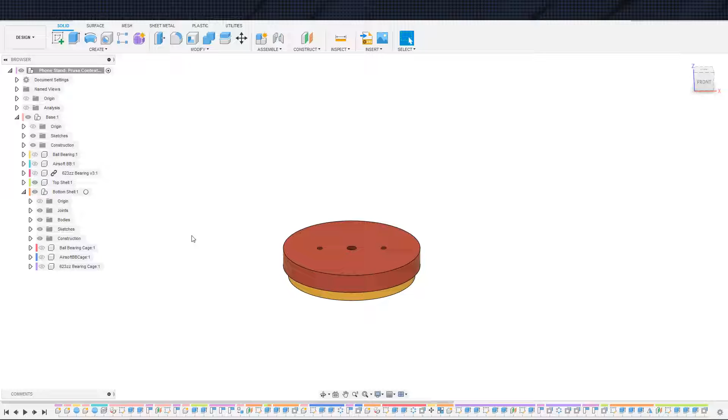You probably should have watched the other video before this one, but last time what we designed here was the Lazy Susan part itself. So we got the top shell and the bottom shell. The bottom shell is going to have cages. Let me do these one at a time. 3 different types of bearings. And then we are going to attach to the top of it a phone holder.

And one thing that I kind of mentioned in passing is we will also be attaching feet to it. I might have been very vague about that one, so if you missed it, understandable. Anyway, a couple things to bring up since the last time we talked.

Let me switch you over to the desktop camera. Desktop camera's not plugged in. 1 second. Whoopsies. All right, should be coming up here. All right, cool.

So I printed the first version of it and printed a cage. Now this cage is the metal ball bearing cage. And I went with this one to see whether or not the airsoft BBs, which are slightly smaller, would get jammed up or anything like that. They don't. That's good. Furthermore, I found that this actually is going to need a little bit more space. I gave it 0.5 millimeter before. I adjusted this to 1 millimeter on future versions, an extra half millimeter on each side, total of 1 millimeter.

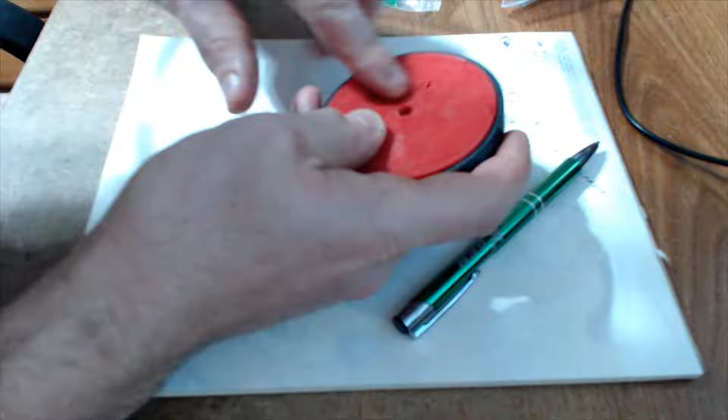Just like this, it may not work terribly well, which is why feet may be useful. Now, obviously, you could just do little rubber stick-on feet. That would 100% work. But I figured making it remixable, as they call it on Thingiverse, giving some options to add to the design would be good. So we got those sunk in there. Now, that is set up 1 millimeter. I looked at it. It's not going to hit anything. So we got that space for that to be sunk in there.

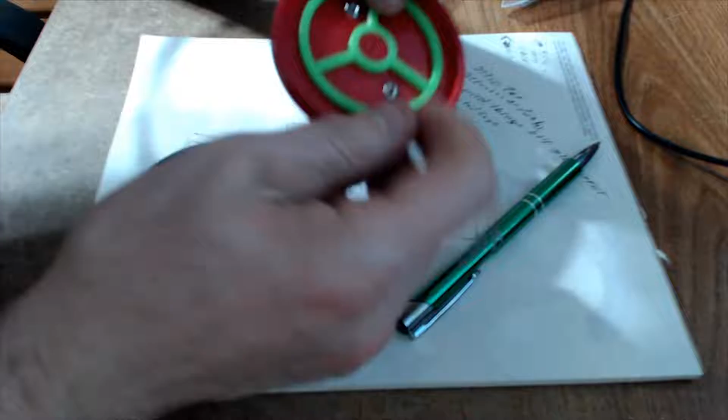On the other side, you'll see those are actually sticking up 1 millimeter. And that would interfere with the roller bearings design because we have that just running along the floor, and we only gave that 1 millimeter of space above the floor. So we're going to go ahead and redesign the spokes for the roller bearings this stream to get that set in.

I don't think we did this on the previous stream, but for this 3-bolt I went ahead and recessed both of these. I don't think we did the bolt at the top, and the reason I recessed that bolt is that if we use this mounting method here, then we really want this to be flush. If we're going to put a plate on here, we don't want to have to design around this bolt. So that's why I went ahead and recessed that. And I made some notes here, so let me just see.

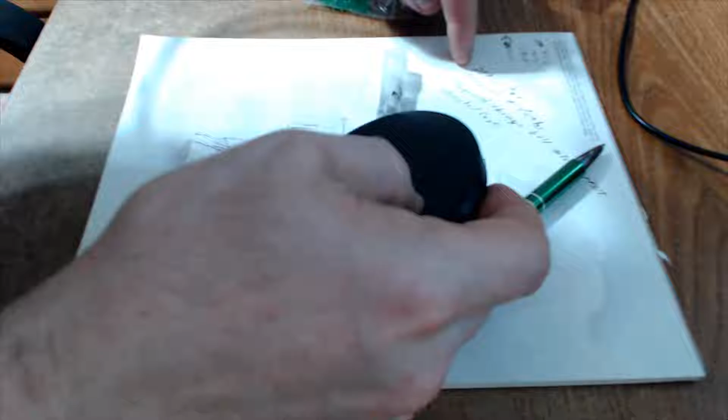I also said something here. I honestly can't remember at this point. I think it may have been that we never put the offset either here or on here. I can't remember where I put it, to give it a little bit of slop and less friction. That may have been what that offset is that I noted down that I added.

So anyway, those are the changes I wanted to get done off stream so that I would have this printed piece and I wouldn't have to print another version of this with adjustments made. Now, final thing to talk about, interesting, this actually isn't too bad. Without any bearings in here, and sorry if that's loud on the microphone, this is not too hard to rotate. So it's an interesting option to be able to run this without bearings if you don't want to invest in the bearings.

So yep, that's everything I can think of to get you caught up on where I was at. So let's swap back over to Fusion.

And I thought I started my music, but it doesn't sound like it. So let's get the music started.

All right. So, like I said, one fix to do, which is the cage down here, the 623ZZ's cage. You will recall that I said originally you could just run the spokes right through the middle, and now I've got to adjust this up in order to clear these nuts here that are only half embedded.

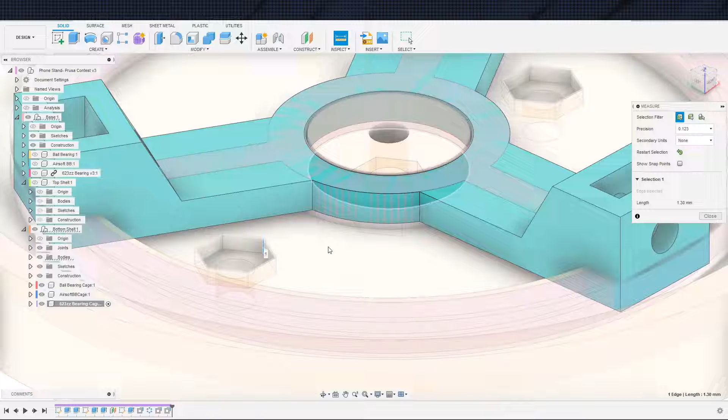Oh, that is one other thing that I did. They're half embedded because I added 1mm to the bottom and then countersunk it. Actually, let me double check that just to be sure. Okay, so they're up by 1.2mm. I countersunk it 1.3mm. So again, ensuring the integrity of the bottom of the bottom shell by not having the nut so close to the bottom edge, and compensating for that by having it sticking up a little bit.

It's not a bad idea, and like I said last time, it made more sense that this bearing cage probably should just be a lot more streamlined. So we're going to go ahead and take care of that this one. Now, the only trick is that basically we're going to back all the way up here, and I'm just going to go ahead and delete everything.

But we're going to have our spokes, our central hub is going to have to go down to the bottom shell. Let me turn the bottom shell back on. So this right here, if we look at this distance here, that's 3mm. That's what we brought it up by.

And oh, actually, there's one more thing. Okay, I'll have to remember that for later. There is one more thing I wanted to show you, but it's not relevant to the conversation at the moment.

So this is up by 3mm, but the center of the 623s, the roller bearings, is at 5mm. So if we just took a spoke from the 5mm mark and ran it outwards, that would be above this 3mm mark, which means that we're going to have to also drop that down. It's not that big of a deal, but it is something I'm mentioning right now.

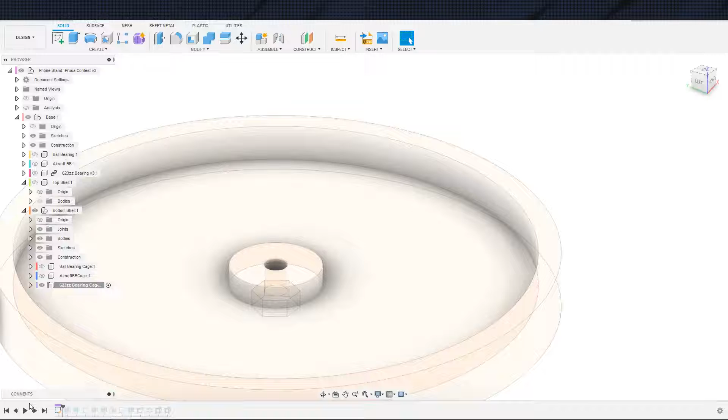So let's do this. Actually, let me skip this too, and I'm just going to delete everything after that, because we're just going to completely redo this. So 5mm is our center point on the bearing. So let me go ahead and call that bearing center plane. Okay.

And this is one of these things where we have an option on how to do this. Let's look at this really quick. If we're going to go down in order to intersect with this hub, how this wants to be printed is actually the top edge here face down on the print bed. So while I would normally want to do nice little circles, because circles are more aesthetically pleasing than squares, we want this top part to be flat.

So we have an option at any rate. We could sketch on this plane and use this 5mm offset that I just put there as a reference, so I don't have to go back and delete it. That would allow us to do something like this. Let me just sketch it up so that you're seeing what I'm saying. So we could sketch something like this, where we cut this circle off like this, and then the connection point, let's call it this.

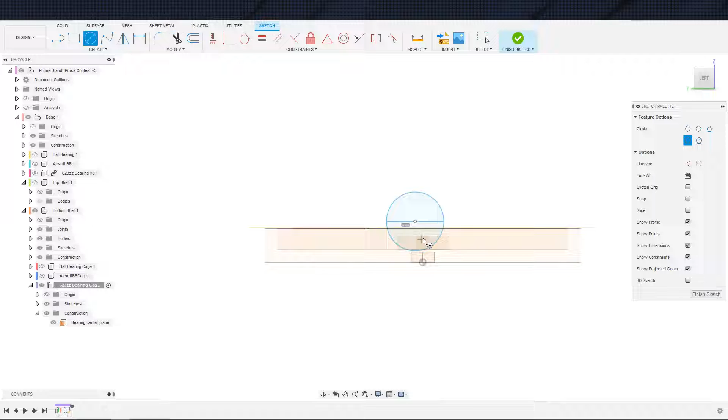So we could make a round shape like this if we wanted to. And then the only trick is that this random point right here, which I'm just drawing in, pretend that's centered, that just has to be centered on this 5mm part. That way, this random point, which is connecting through to the bearing, is in line. That's the only thing we'd have to worry about.

And again, we could do it like this, or we could design it top down. It really comes down to preference. I think I'm going to design top down first, and then maybe we come back here and do this plane, and we just figure out how we want to go about getting that implemented. But the reason I'm starting from the top down is that getting the hub situated first is the easiest place to start. It gives us a reference point. So let's go ahead. We're just doing the hub right now. We're not going to do the spokes just yet.

Again, this is at the 5mm part, so technically speaking, it's maybe a little bit below where we're going to want to end up. For example, if we have 3mm thick spokes, those want to be centered on 5mm, which means that half of 3mm, 1.5, would take us up to 6.5. I don't know why I added the extra in there. I divided the half in half again. So anyway, 6.5 would technically be the top of this hub. We can go ahead and adjust that later. We can just extrude the top of it up to match the spokes.

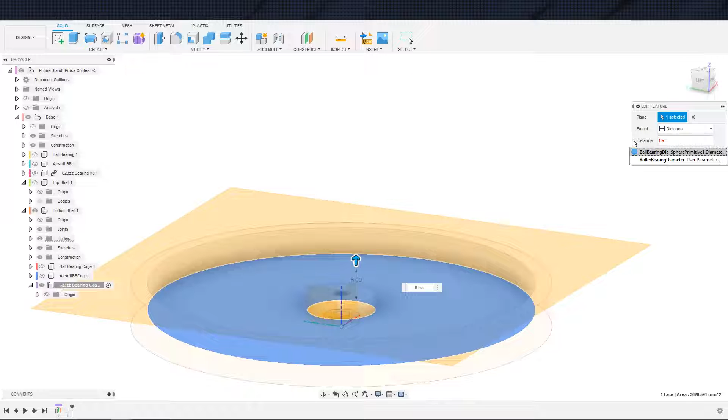Or we could, because I already named this bearing center plane. No, okay, I take it back. I know I'm being wishy-washy here, but we are going to make changes because it makes more sense. So let's do it like this. The roller bearing diameter divided by 2 gets us to the center point, plus wall thickness divided by 2. And that will get us our 6.5, as you can see down here in the description. And this is also now parametric, which is nice, although frankly completely unnecessary because we're not going to be changing any of those parameters. So that is now the very top of what we're about to build here. This cage.

It's not really a cage because it's not actually containing the bearings themselves. It is the spokes, the hub that's going to be... turn you off a second so I can click this. And I just did not complete that sentence, and that's okay because you know exactly what I'm talking about.

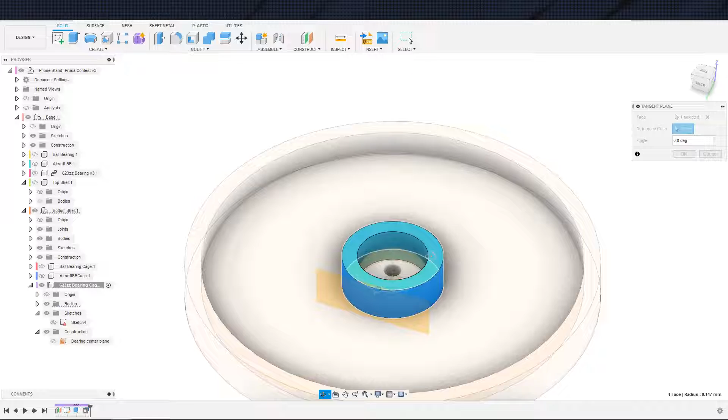Alright, and then again, last time we decided to offset this a whole bunch, a lot more than I normally do for 3D printing, because this wants to run as freely as possible around the central hub here. And let's turn this back to blue, just for my sanity, because the other one was blue. And now, coming off this way, I'm going to do a tangent plane, just so that I'm not working from the center and have to offset. So let's just grab an origin to reference. There we go. And it doesn't matter which one we're referencing because we're only doing one and then patterning it around.

Sorry. One other thing while I'm talking about patterning around, the other cages, I didn't say this, but they don't necessarily need to be 3 spokes going all the way around. I want to just have that said for the record. They could be just 1 spoke because all it's doing is positioning, and there should be, at any rate, no lateral movement of the bearings towards the inside of the ring. And therefore, it's a bit of a waste of time.

I mean, waste of time may not be the correct way to say it, but it's not accomplishing much, let's say that, to have, yeah, I guess that would be tangent to that line because we already compensated for it. Regardless, it's not accomplishing much to have the extra spokes because they're not actually bearing the weight.

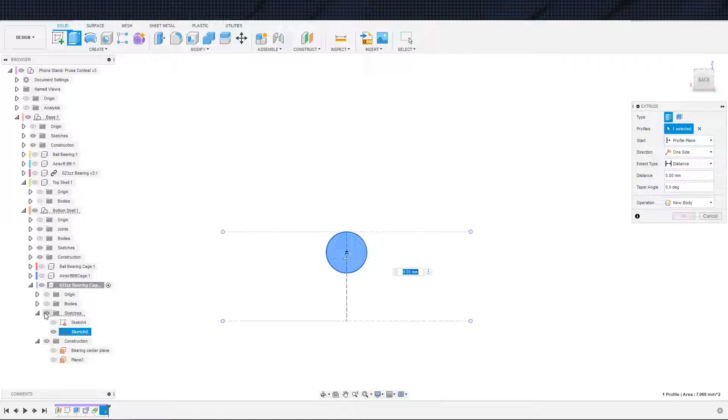They're not making, you know what I'm saying? They're not stopping anything from going anywhere. You could just have the one spoke to keep the outer ring in place, and then you'd be good. So it's a little bit of extra plastic, but how do I say this? It's more reassuring to have the extra spokes holding it in place. And I'm just trying to think.

We had a number, and I already deleted the other one. So the question is, where was that number, and do I need to bring it back up? And the number was how far out this spoke extends out towards the wall. And I think I will go ahead and redraw that in. Let's hop back into, well, try to hop back into the sketch.

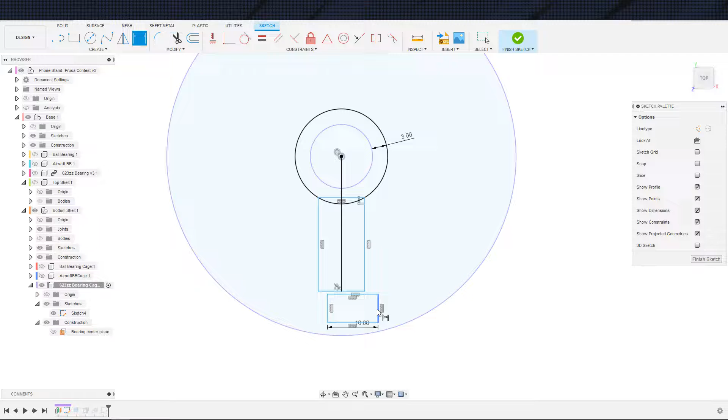Okay. So here's our inside wall, and as you will recall last time, we did one of these. Yeah, I'll just use that. Did one of these. That's centered. And then you'll recall these were coincident. And then we had the 10 millimeter bearing there. And this was 4 millimeters wide, as I recall. And this is just our mock-up of where that bearing is.

And that bearing, I can't recall if we gave it a little bit of breathing room here, whether we actually put this in like 0.5 millimeter from the wall or not. But we did something along these lines. Actually, I seem to recall us having another circle here because we had this tangent to something. However, that should be unnecessary at this point. It should be sketchable like this. So, stop. Don't move. I just want you to construction line. Alright, so that's how long our spoke is going to be.

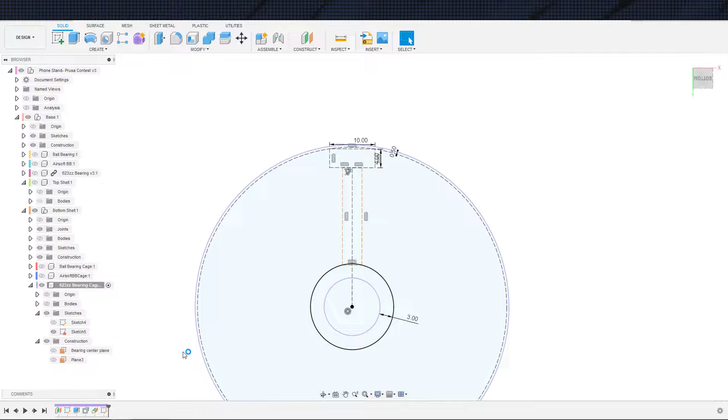The question is, I'm kind of curious how this is going to work. You are on the wrong side. Everything was upside down. That is unfortunate. What if I do this, is my question. Let's turn the bodies back on to see what's happening. Yeah, okay, it will work. I just have the sketch on the wrong side. We are on the bottom right now. We want to be on the top. And then that is front. So actually that is in the right place.

Control Y. Remember when I said it didn't matter where this tangent plane was? It's going to matter for us now, because we have to line it up with the other one. Alright, there we go. Except for when we flip it upside down, of course it does that. Okay, the top's still there, so that's 5 millimeters.

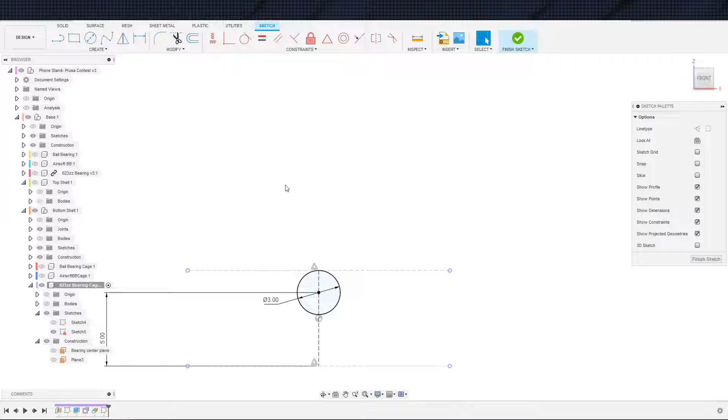And again, I could just tangent this to that, but because we're most concerned with this spoke being centered on the bearing, it's better to just call that center of bearing instead. Roller bearing diameter divided by 2. There we go. The other thing I should probably do is this should probably be 4 millimeters, in which case we're going to have to redo our math. So let us change that to 4 divided by 2. Yep, that's still in line.

The reason we're doing this is because on the back side of the bearing, let me just swap you over to the camera. So on the back side of these bearings, this is a 3mm bolt right here, M3 bolt. You can substitute this for the plastic that we're about to print. If this is 3mm all the way through, then it just goes straight through; by opening it up to 4 or 5mm on the spoke, and I may even do 5 just for the heck of it, that gives us more meat for it to be pressed up against.

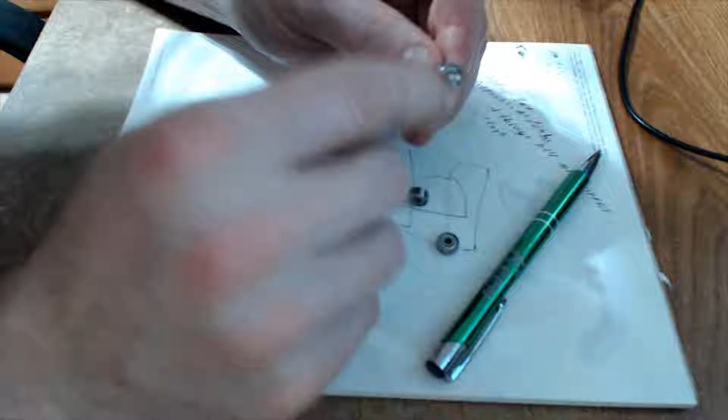Again, imagine this set going to the hub. So this part extends to the hub. This is 5mm, 5.45 technically on these button heads. Button heads might still be 5.45, might be 5.5. We then go down to 3mm to get through, and again, that's the clippy part I was talking about last time that was going to be one of the snap-on features. We'll have a snap-on joint.

The alternative is we could use bolts, screws, and come through into the plastic, leave a 3mm hole, which will be slightly undersized because 3D printing, and then just tap threads into there. That is an option. That is absolutely an option. We'll see what happens. The snap-on feature sounds funner.

It sounds more fun. However, the problem with the snap-on feature is that for features this small on an, what do you call it, an FDM printer, it's not going to be terribly precise. So it may be better just to take bolts and tap them on there, but we're going to attempt it with the snap-on feature instead. So let's hop back over to Fusion. I'm getting better at not forgetting here. And now let's get this spoke done.

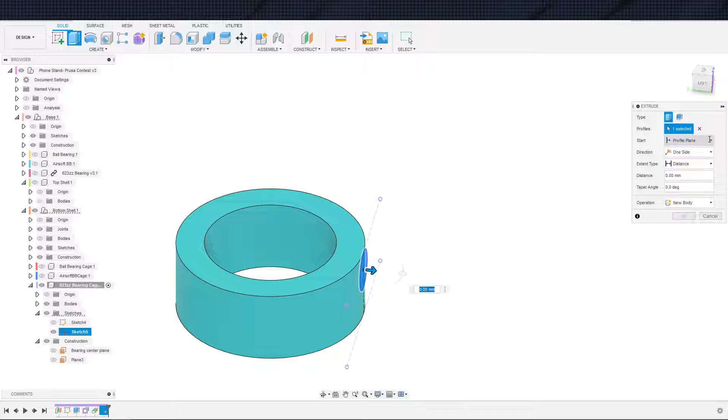From object and distance. So it's one of those things, the two objects thing. Okay, it's not showing it here, but sometimes they give you an extra toggle box down here, whether you want the closest extent or the furthest extent. It's not giving me that, so I've got to come here and look at this and say, okay, I'm pretty sure that's connected right there. Yeah, that is connected there. So it did come all the way to here.

I have had times, especially when cutting into an object, for example, if I had text here and I was trying to engrave text on this, I've had times where I've said start from the face of the object, and it will do some parts of it, but not others. It's a bit weird. So just one of those things I'm telling you so that you can watch out for it when you're designing your stuff.

Actually, I'm going to go ahead and give us 2mm here, because the snap through functionality, I want to leave a little bit of space for. So if we come a millimeter out the other side, actually, let's go 4, because again, these bearings don't necessarily need to be so close to the edge. So if we go 4 and then we're out by 2 or 3, we still have 1mm of clearance here. So we should be good.

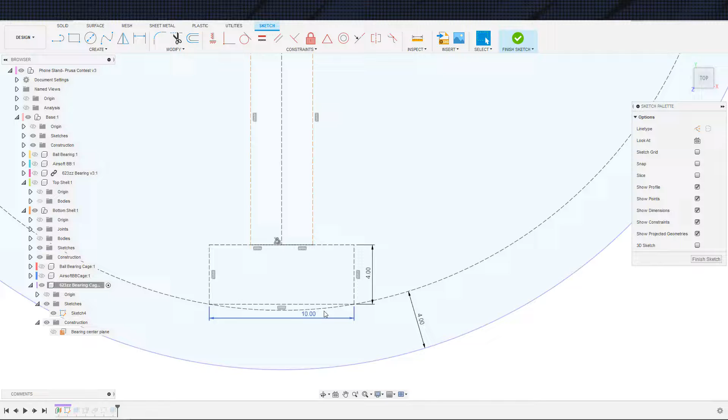So let us go ahead and... How do I want to run this? Again, I can come down here. Spoke tangent plane. I could reuse this and then again extrude from object here. That way I don't have extra planes that I'm not going to use, and I think that's probably what I'm going to do. I was talking about this before we started, and then I forgot to actually do it. Okay, stop being silly. Finish. Double click that. There we go.

When I first started drawing this, you saw me do this circle here, and then I went and put the other circle down here, and I was like, oh, whoops. That's what I meant to do. We want to keep this flat for 3D printing purposes because we're designing for 3D printing. So we want, when this gets printed, to not have any overhangs, and therefore this extrusion here is actually going to be all of that as well. So you can see this is the D shape, and we're doing that only because it's going to be printed like this.

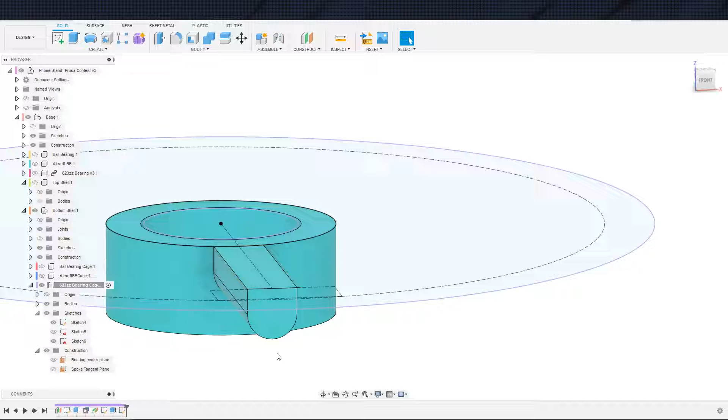So with that explanation out of the way, our next problem here actually is back to 3D printing and small features. This feature is going to be small, and therefore it's going to be difficult to print. Plus, if we center this right here, let me just do this so that you're seeing what I'm talking about. Oh, that's funny, it's not giving me center circle. So let's draw that line in. So if I do my 3mm snap feature here, you can see that's going to be suspended in the air, printing from here. So let's flip this over again, just in case you have trouble visualizing.

When this prints, it's going to be floating in the air here, which means that it needs supports, and supports are going to make it rougher on top of the fact that it's already a very demanding feature. So at this point, I'm actually thinking that we will go with that second option I was talking about, which is the self-tapping hole. Let's see here, turn that off. There we go. So we will just put a hole in here, and you can thread some bolts into it in order to attach the bearings. That is how we will go about it. And we can make it any number really. So let's just call it 10, minus 10.

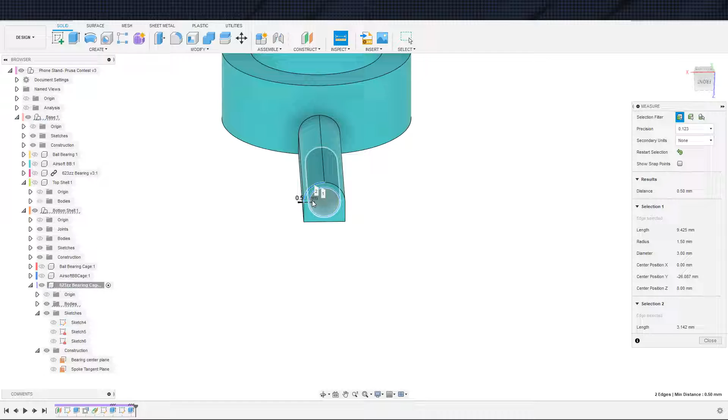And the next question is that wall is a little bit on the thin side. Yeah, it's only 0.5 millimeter. So we're going to want to make that bigger. And, I just keep on adding ands. We're getting a little tall here.

Now, I don't think it's actually tall enough because our upper limit is 10 millimeters. So right now we are at 5 plus 2.5, which is half of the 5 millimeters. I think that's what I made this. Did I make this 4 or 5? All right, we'll come back here and find out. Bearing to center plane. I made it 4, didn't I? Let me edit feature. Please let me edit feature. All right, I left that at 4. So we're at 4 divided by 2 is 2 plus 5 is 7.

We just need to get below 10, and that means that we can have up to 10 millimeter because 5 and 5 is 10. So the point being is that we could have a very large spoke coming out here. So we will just update this to, let's say, 6 sounds a little big. 6 is quite thick in terms of plastic. It's going to seem a bit bulky, so I'm going to leave it at 5, and we're going to call it a day. So at 5, this should now be between here and here.

1 millimeter, it did not update. Let's see here. Oh, and actually I know exactly why. So let's come back here. And we're going to do this. I can't start with a letter. So spoke, we're just going to call it spoke dia equals. And we just got to throw some extra parentheses in here, if I recall correctly. Should work. It did not work. I could have sworn I've defined these inside before, which is a little bit funny. Alright, we'll define it outside. That's fine. Change parameter.

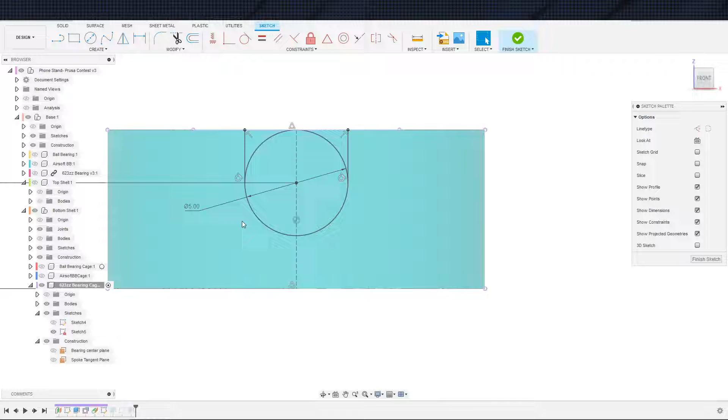Actually, can I retro this? It's one of those things, I try to define parameters before I use them, but this is a situation where I can't, so we will attempt to do it this way. And let's just double check that that's 1 millimeter now. On the outside, it is 1 millimeter. And now if I come back to, actually, let's think about this. That hole's not centered on that, is it? No. Okay. I don't think it is. So, therefore, we come back here. Basically, I was wondering whether or not we had to... Huh. Why you got a problem with me? There we go. Okay.

I was trying to figure out whether or not we needed to make any other adjustments here, but we should be good. So, that is 30 minutes in for the record, and that was a good bit more time than I expected to spend on this portion, unfortunately. But we are now done. We just circle pattern this out, and that is the update to this cage hub thing. Again, we'll just leave it at just okay. Adjust was not the correct option there.

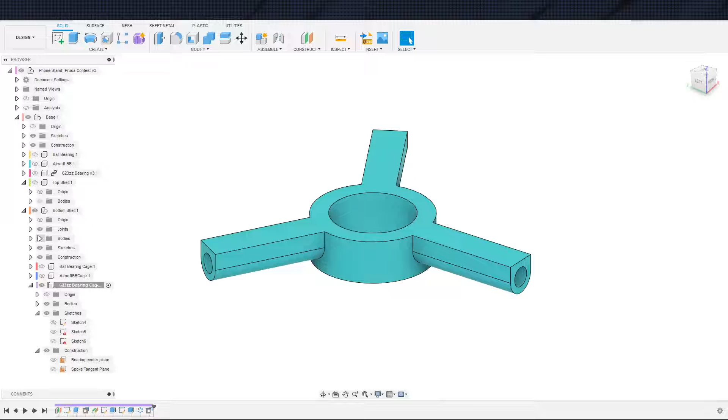Alright, there we go. And actually, the one thing I will do is, I don't want any scraping here, so I will just offset this by 1 millimeter, because all we've got to do is be on the hub. We don't necessarily need to be all the way down on the floor there. So long as we have at least enough that it doesn't slip off, which it shouldn't because the top shell should be holding it down in place. So for all those reasons, we should be fine. This hub shouldn't go anywhere, so long as it has just a little bit of grab on the central hub of the bottom shell. So that gets us onto the main point of this episode, which is the phone attachment.

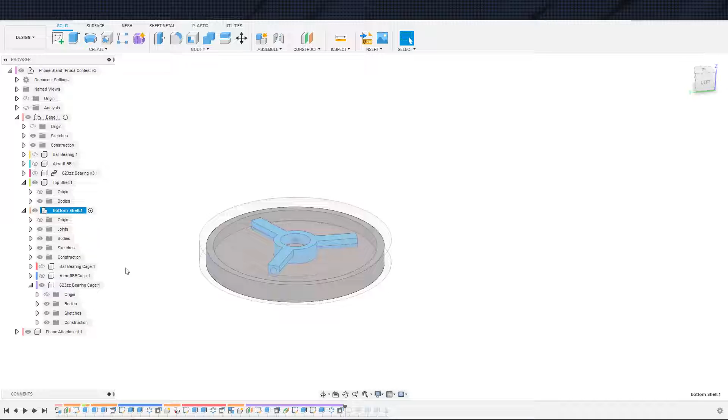Yay! New component. Phone attachment. And again, one of the reasons why I've added these little mounting holes on the top here, and let's just really quick show that. Oh, where did they go? Tell me I did not. Does the bottom shell? Oh goodness. Okay. Either this account did not sync or I did not hit the save button, and by account I mean this instance of Fusion. Huh. Okay. I will add those back in. That is very unfortunate. Okay.

Let me resync this. Hey, look, there's stuff over here you don't know about. Resync. Versions. 623. Oh, I see what happened here. Okay. Scary moment averted. Is this the phone attachment? Yeah, it is. Okay. Now I know where that is. We were back in the timeline. Okay.

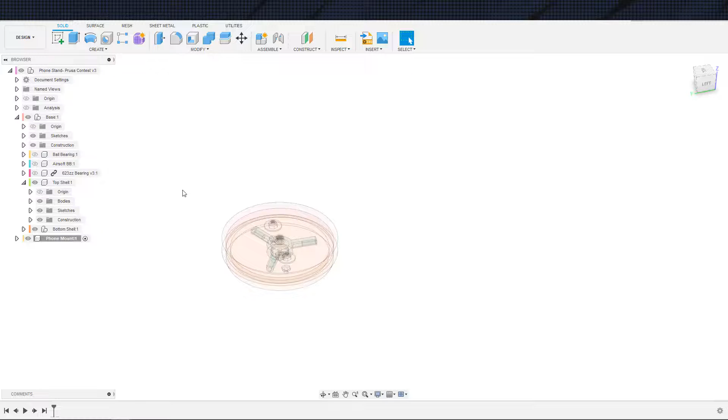Anyway, what I was going to say before disaster nearly struck there is the reason, again, that we have these instead of me just hard designing the phone mount into the top lid is so that people can make their own phone mounts. That is the idea and the purpose, so that this is extendable and other people can have fun with it. Otherwise, I could just design it directly into the top lid, and that would be a thing.

Obviously, if you want to get technical, that would make it more difficult to print, and therefore it is better for it to be detached, but it doesn't necessarily, but it is an option, is what I should say. It was an option, and my reason for not doing it is because I prefer to have the option available for other people to create their own phone mounts. There you go.

So let's toss these in. These are the ones that we're concerned with, and let's do a slot. Slot, and we could do center to center. Center it there. Radius this out. Whoops, not that kind of radius. Like that. Just 3mm is fine. Again, 3mm is my go-to number. So after this is assembled, then you can slap... Actually, no. We do need to leave this hole open. Good thing I thought about that before I said something that made me sound pretty stupid. Alright.

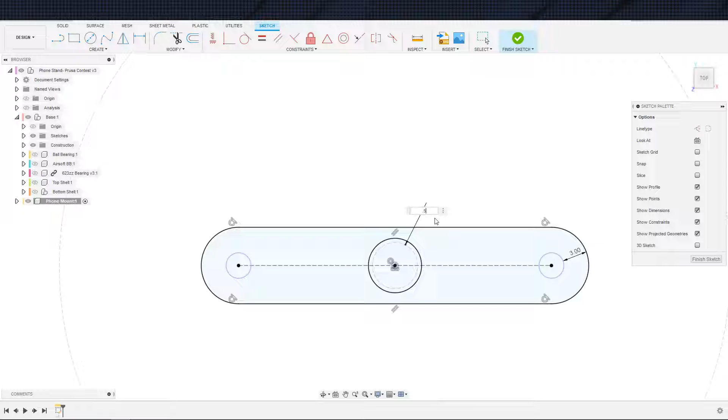You will have to attach this base first before you attach the top shell to the bottom shell, because all these bolts are right here and you won't have access to it. So that is something important that I'm going to have to keep in mind to make sure that everybody is aware of. 0.5 is more than enough just to make sure that we're clearing. And let's get this popped out. And just as the mounting plate, that wall thickness is fine.

And what color do you want to be? We already used all these colors. Let's see what other colors I randomly have in here. Plastic opaque, orange. Have we used orange yet? Yeah, we used orange. Brown. You are now brown. Cool.

All right. So, again, this is going to be a two-part mount, and the first part can be... Actually, do I want the first part built into this? So this was one of those design decisions that I did not make yet. Actually, let me even do this. New component is what I should have done here. Back to just keeping everything organized, and in order to introduce joints, it's easier to have everything as their own components. So there we go.

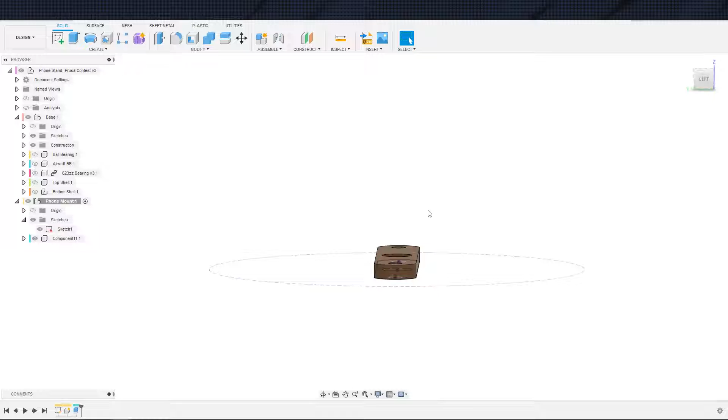The mount is going to want to be pivotable, I should say, in the YZ basically. So if we're looking at this Z-axis, actually that would be X. No, I'm looking at it wrong. There you go. It was Y. So going from Y minus to Y positive here, depending on how you're looking at it, we do want it to be able to tilt this way, that way, because we're assuming that you're not always looking at your phone straight on. So we do want to build a pivot into this. So let's go ahead and do that.

So we're going to call this the attachment plate. And we'll activate it. And then the question is, how do we want to go about defining? Because we could just grab this origin plane here, but that's not very well defined. So let's do this. We're going to go axis through cylinder. So we got an axis here.

We can now go plane at angle there and 90 degrees. And then the next question is, do we just want to design on this one? So let's call this center of through hole, and that is the Y center of through hole. So do we want to just design on this and then offset it, which is completely reasonable, or do we want to more specifically, and I think we will, do the same thing over here?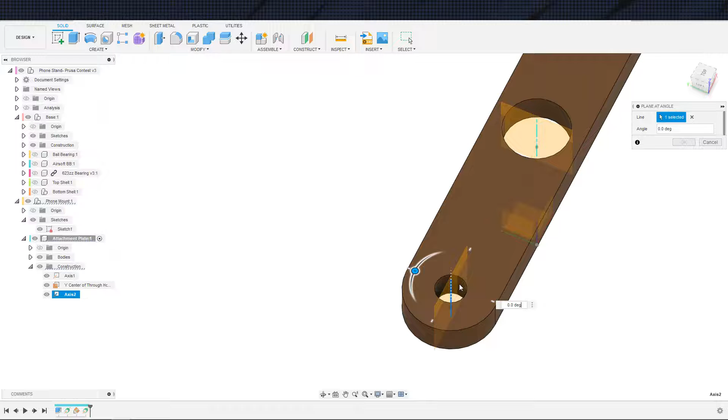It's one of those things. I've said this a few times before, but in case you don't watch all the episodes, there are 1.5 million ways to skin a cat, and there's not necessarily a right or wrong way all the time to design something. A lot of the times you're going to design something once, and that's going to be it. And if we're from the front, this is the Y left mounting hole. You're going to design it once, and then you're never going to go back to it again in many cases, and therefore it doesn't necessarily matter how you do it. So this is a bit obtuse the way I'm doing this now, and not even necessary, or at the very least more convoluted than it needs to be. However, it does make me happy, so there's something there.

Alright, so I really don't like that projection. Let us come back here and grab a different projection. I am going to grab that edge, and then I'll just fill it in. Projections always break anyway, so while that's probably not the best projection, it gives me the fewest amount of things that can break it. It's only 2 edges, as opposed to when I took the top face as my projection. That was this circle, that circle, that circle, this edge, that edge, this face, that face, that edge. It gave me a lot of different lines that could get screwed up and would have to be redefined. So that is why I grabbed those 2 edges instead, because it's a lot easier to re-project those 2 edges.

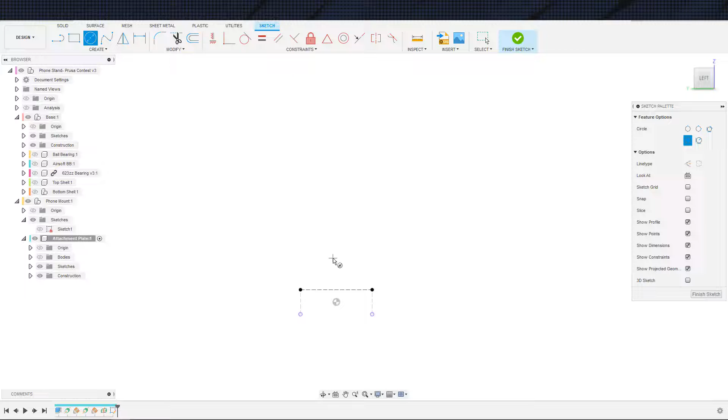So with that explanation out of the way, let's get this thing drawn. Tangent, tangent, perpendicular, perpendicular, okay. And then our mounting hole here. My general design philosophy is, if you start out with M3 bolts, then you generally should just continue using M3 bolts for everything, because that makes it easier to source bolts for the project. But this being a hinge, I kind of want to go up to M5s, if not M6s. M6s is probably overkill, so at least M5s. Yeah, I think it's worth it. So we will make this connected via an M5 bolt, is the conclusion I've come to.

And this height is probably not going to be relevant. So let's make it as small as possible and tangent that there. And we can go ahead and pick that up. So this here, body, and we want a symmetric, that way this is still on center, whole length, and I think I'm happy with wall thickness. Whoops. We could make it a little bit thicker because it is a hinge holding the phone. Yeah, I feel comfortable with this. So there's one hinge, and actually, you know what? I take it back. Already changing my mind.

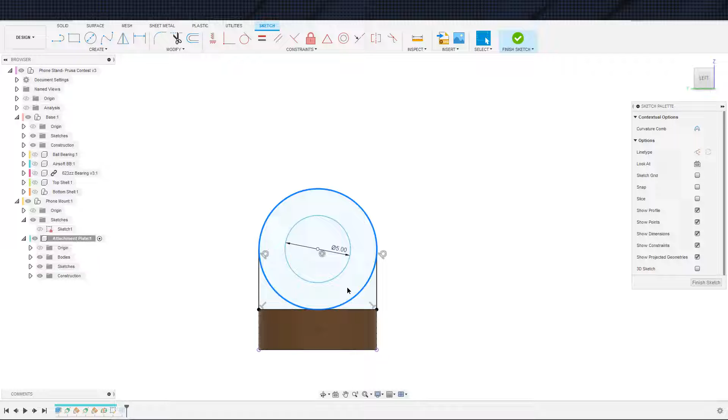We're not going to make this tangent, because I'm looking at this right here, and it's only 2mm, which means that the part it connects to on the other side is going to be thinner. The hinging part that connects to the bottom mount of the phone is going to have less space to swing through, and it's going to have to be thinner. So let's give ourselves another 5mm. No, 5mm too much. 3mm, 2mm. It's 2 plus another 2, that will be 4 overall. I feel comfortable with that. So that's going to be our offset there.

So now we have a little bit more space to bulk up the connection point over here, but it may be better to do it on the outside. So let's go ahead and mirror that over. Feature, mirror, and we actually want to use this Y center through hole here just in case stuff moves. Again, that's why I made all these extra planes, so that we have stuff relative to the features of our object as opposed to relative to the generic origin.

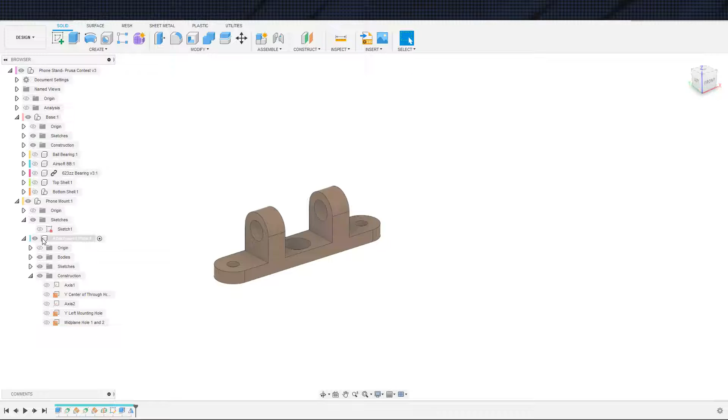So that gets us there, and now we can move on to the next part, which is the bottom phone mount, I guess is what I'll call it. It's a terrible name, but it will work.

It'll do, donkey. It will do.

Now, again, we have an option on how exactly we want to position the start of this. The first thing we're going to be drawing is the hinge attachment. That way we know where we're at. And then after we get the hinge attachment, I'll go ahead and sketch the rest of the bottom of the phone mount. So,

alright, I think what I'm going to do here is hop back over to this and just throw a new plane here and call that side of hinge. Alright. And now we'll hop back over here and use that plane as a reference point. And we just got to get a projection here. We can leave this guy as a solid. Everything else will be construction lines.

And now here again, I can go ahead and make this a full 3 millimeters of space here to give us a bit more meat. 3 millimeters, I'm happy with that. It looks a bit bulky in comparison, but it is the wall thickness that I like, and therefore it's what we'll be keeping with.

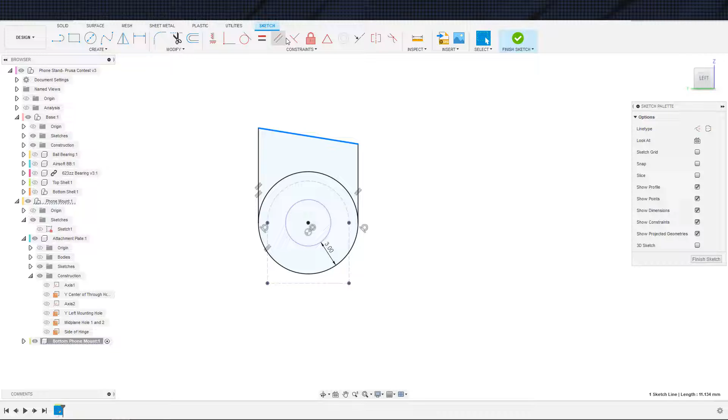Now, this one here, you may recall, let me just hit this really quick so that my brain can catch up. The other one, I felt like I needed some space for the extra hinge space here. This is why I lifted that up, so that I can make this a little bit bulkier. But this one, I don't see any reason not to have tangent. So that's what we're going to do. And we can go ahead and extrude this guy out. I'm just turning that guy back on so that I can see what I'm doing.

And what? I've already forgotten. Did we do 5 millimeters? I think we did 5 millimeters. I should probably make this a variable, like hinge thickness, but I'm doubting I'm ever going to change it.

So the next thing to discuss here is right now, this is going to be PETG on PETG sliding, which means that our hinge is not going to be terribly effective. We can put alignment features on this, and then it would snap into place. You wouldn't have fine adjustment abilities, but we could attempt to set it every 5 degrees or something like that, and basically ring this hinge and that hinge with marrying features so they piece into each other every 5 degrees.

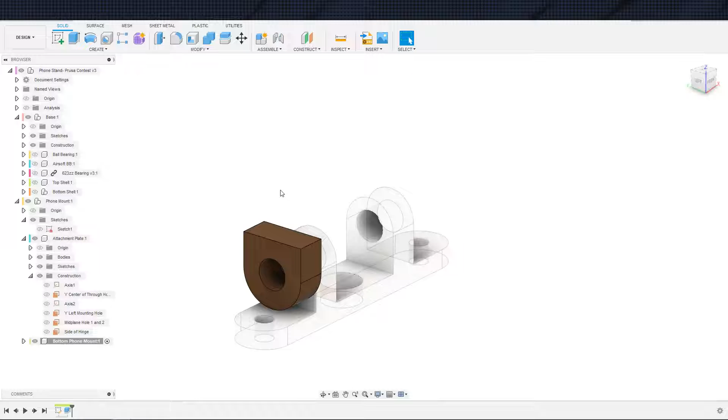Although you could make the argument that not drilling them out and leaving them tight solves this problem we're trying to solve with this hinge rotating freely. The bolt would actually keep the phone positioned in the way that you're trying to set it up. So that is one argument to not drill them out. But the point being, this prints just fine like this. The bottom attachment plate will print straight up and down, no problem.

This guy right here, though, may not print terribly well. Let me just hop here and get this positioned. If you imagine some kind of holder heading this way, we probably won't be able to print it like this, which means we'll probably have to print it like this, and we'll have the design so that the right hand side here where my cursor is, is flat against the print bed. That may be how we're designing this moving forward. We do have, again, this overhang right here.

In that case, if this is, let's rotate again, if this is now the print bed, then we have this overhang here. But as I stated before, I'm not too concerned about overhangs on round parts. I only avoided it on the other one because it was so close to where it was just round all the way around, and it wouldn't look terribly good from the top view is my biggest problem.

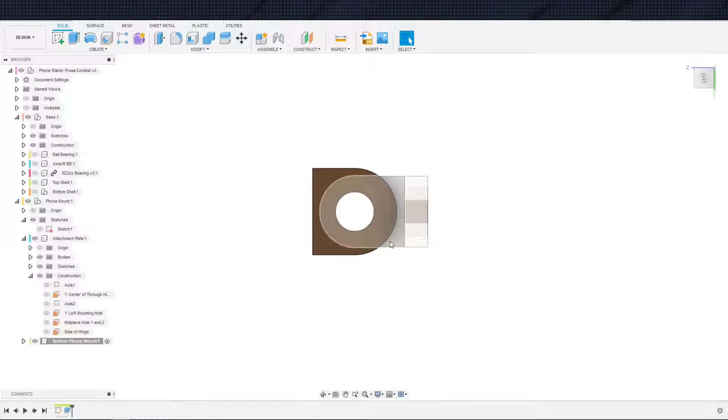Whereas this one, any overhang artifacting that happens here when we print it will be on the back side of the hinge, because again, I'm designing so the phone sits in front of these two boxes that I'm drawing right here. So the phone will sit up in this area, in which case you will never see the artifacting on the bottom side of this hinge. So it's not really an issue.

Well, I mean, it's a little bit of an issue, depending on how OCD you are, but it is not something that's going to be a deal breaker that's going to look really ugly. You're not really going to see it. So that's where we're at right now. And now we can just do a simple phone mount.

And I'm saying simple because, frankly speaking, one thing I should say, actually, I did tangent here. You'll recall back on this sketch, I did tangent. I was only able to do that because I knew that this circle right here is bigger than that one.

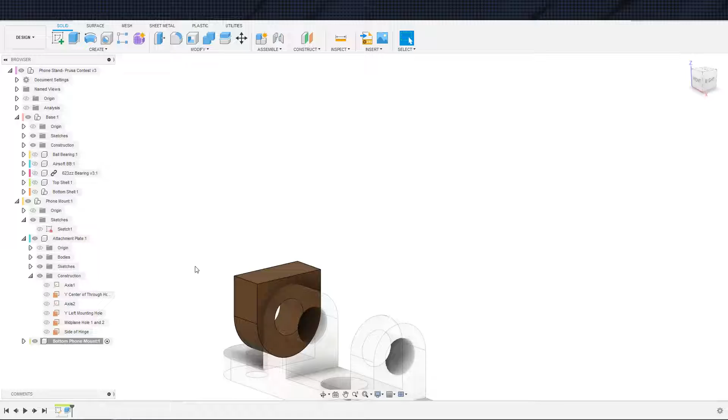If we made this tangent to that circle, then as this hinge rotated, it would scrape against this rotation point right here, which is not a deal breaker. It's not something that's going to stop it from working necessarily, but it would be obnoxious. This, we got a little bit of clearance before we do the top mount here, so we're good.

So all that explanation and thought process out of the way, let us go ahead and mirror this. Mirror, feature, and we'll go back to the center plane on the attachment plate. And again, I leave it at whatever the default is. It used to be that optimize was the default in Fusion, and I just left it at that until something broke. I don't know why adjust became the default. Probably could read the patch notes and find out why. But for the time being, I'm not terribly concerned.

Now, after much ado, we can now draw this phone holder itself, and I will go ahead and use this center of the through hole because that's going to be centered to everything else, and then I will just symmetric extrude out to these two hinges. So let's get one of these hinges as a reference point. Bodies, turn them off, hit the not visible button. And we don't need those, they can just be construction lines.

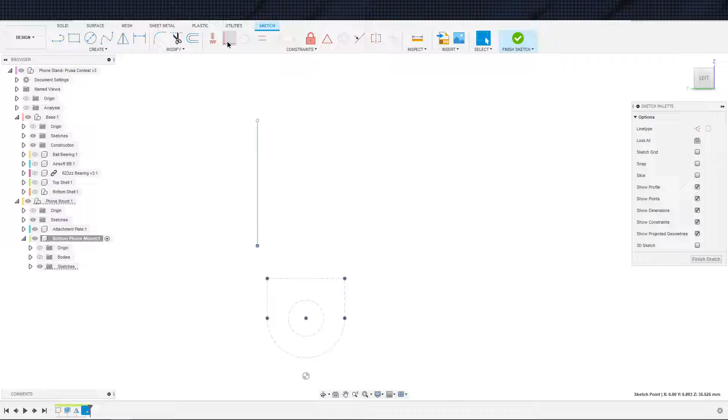I am not a terribly artistic person, and therefore this is not going to be a terribly artistic phone mount. I say that, and I should probably give myself a little more credit. It's not that I'm not artistic, it's just, how do I want to word this? I am only artistic basically in things outside of the computer. Inside the computer, I just have not spent any time figuring out how they work. So I am not terribly concerned about how this looks right now. It's supposed to do a job, it's going to get that job done, and other people can remix this and make fancier mounts.

So this is the general shape of the bottom. Good. We're all on the same page. The question is how do I, and it's the perpetual question. Sometimes I will get this general shape and then I'll do one of these minus wall thickness, and then I'll just toss these guys in here. That is one way of doing it.

The other way of doing it, which I also do sometimes, is to overlap two boxes, and then I'll do, for example, collinear, and then wall and wall thickness. Again, 1.5 million ways to skin a cat. It really depends on what I'm thinking at any given time. And today I'm thinking that we're going to do offsets.

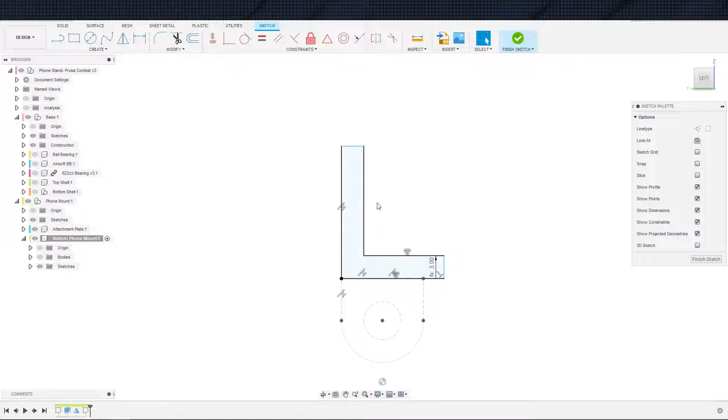So now we need to start taking some measurements of phones. So the smallest that this is going to be able to hold, well, let's take a look. And frankly, I have a Droid Bionic, which is probably not a phone that anybody uses at this point. So first off, let me just say, I'm not designing for somebody to mount their Nokia onto this thing, okay? If you really want to see Snake play itself on your Nokia and you need a phone holder for that, you go ahead and make that one, okay? That's a rather specific ask. I do have a Droid Bionic, like I said, but that is with a project right now, and I do not have access to it, so I can't get that measurement.

So this is a Galaxy S7. Let's go ahead and turn the camera back on, just for the heck of it. This is my old S7. I'm guessing this is on the smaller end of smartphones at this point. The only thing smaller than this that I can think of is an old school iPod, or actually no, the iPod Nano would be smaller, but in terms of stuff that would have a screen that you'd actually want to be looking at constantly, something like an iPod might be the smallest thing. And I don't even know if anybody has an iPod. Well, actually my brother, I think, still uses an iPod for certain situations where he doesn't want to have his phone out. But the point being, we're going to call it 69.5 that I'm measuring here.

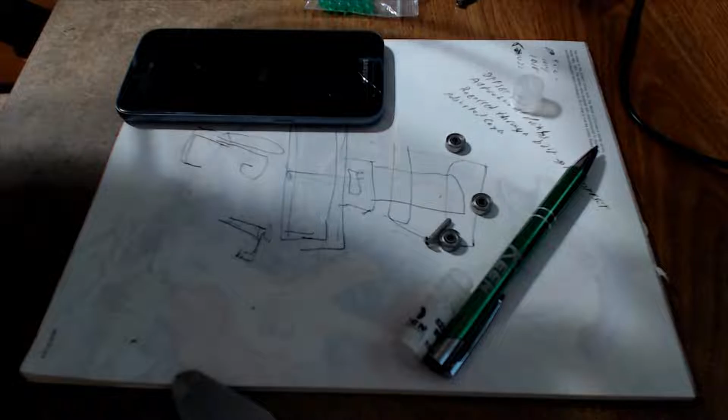If we just make it 60 millimeters as our minimum opening space, I can't imagine anybody having real complaints about that one. Again, the more likely complaint is just that the phone holder does not look terribly interesting. So there's a couple ways we can do this, and actually there's something else that I should do. That was the minimum. The other thing we want to keep in mind is a maximum. So this is my current phone. This one's like 85, so if we call this 90, our overall is 60 to 90, okay, is the dimensions that we're trying to hit. If you want to put an iPad in here, or an Amazon Fire device, it may be one of these situations where, again, I just say, enjoy designing that one.

And the other thing I could say is I could look at other designs that are out there right now that have mounts for phones. Sorry, I know I hop around a lot and my brain just goes all over the place. It occurred to me that rather than doing this very specific mount, I probably should have just grabbed this GoPro mount that I have over here, because GoPro mounts are pretty universal, and just had the GoPro mount as the option. Sorry, I don't have this in screen. This is a GoPro mount that I printed for the tripod that you're sitting on top of right now. GoPro mounts are pretty ubiquitous, and there's probably a ton of drop-in phone holders and iPad holders that fit directly into a GoPro mount. So this is probably what I should design as an attachment on there.

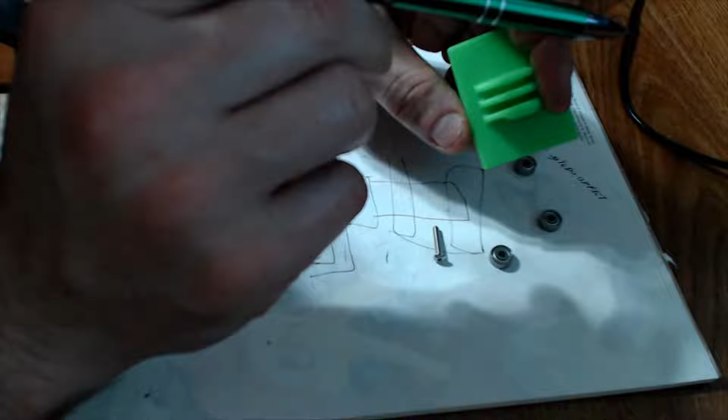Yeah, okay. Well, alright. So here's the argument. If I do this, I was going to say I don't really have an incentive to make an actual phone stand, because I can just say, yeah, screw it, get your own phone stand. But that obviously does not fly. So... why do I gotta make decisions? You guys make decisions. You do that.

And the last problem that I'll bring up is that obviously the GoPro mount is centered underneath the phone, tablet, whatever. Our through hole is also centered. Now, that doesn't necessarily matter. We could off-center this. Actually, let me grab the Lazy Susan really quick. We could off-center it like this. So when you spin, it's spinning a little off-center, but nobody really notices. Especially because any phone or iPad is going to be like this, so the center of balance is going to be more or less dead center of the Lazy Susan anyway. So I'm probably whining and complaining for no reason, and we are going to go ahead and replicate a GoPro mount and undo all the work we just did.

Alright, let's switch you back over to Fusion.

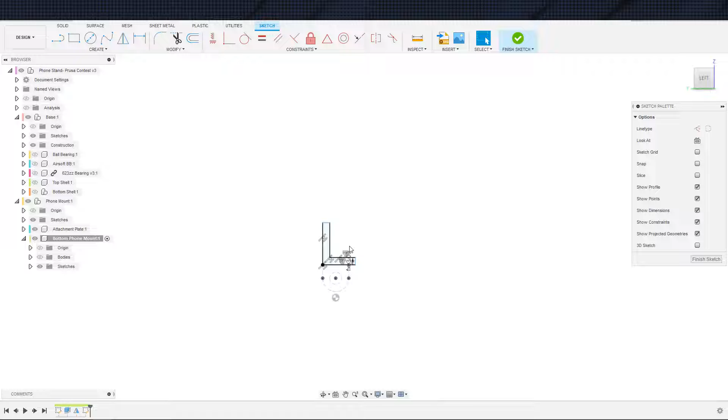Alright, we can get rid of this now. And let's back up. So, attachment plate. What I'm going to actually do here, rather than get rid of all my work, is I am going to go here. Do we want another component or do we want a subcomponent? So I'm going to do something here called boundary fill to create a new component. I just don't know whether I want that as a subcomponent.

Where's boundary fill? Boundary fill. So we'll click that and then click that. And yeah, we're going to go ahead and make that a subcomponent. And I'm going to call this GoPro mount. All right. So now we have this GoPro mount, which is based off of effectively this body right here from the attachment plate. So if I turn this off, you'll see it's still visible because that's the GoPro mount.

And if I go ahead and forward through all those other things, you can see that they're not actually here on the GoPro mount. So in case you didn't know that trick, that's a new trick for you. And now we'll come back over here and adjust this guy to fit the GoPro stuff. So the GoPro, let's see, because I do not remember what kind of screws attach to this guy. Okay, that is still a 5mm. That's good to know.

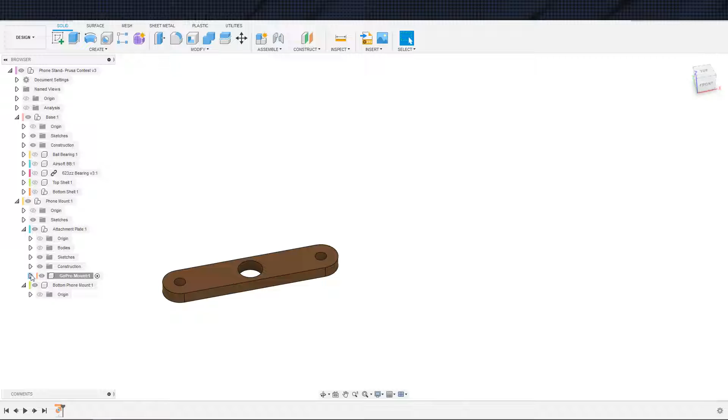So the first question we want to answer is, and I'm going to go ahead and toss, actually let's toss that in here. Just a bottom of plate construction plane. Bottom of plate. And I'm going to go ahead and slide this back here, just to get it way back. And we will go ahead and sketch on that guy. And is this the front here? Yep, that is the front there. Good. Just wanted to make sure I was facing the correct direction.

So a couple different ways we can do this. One, we could bring this all the way out, and I'm just drawing a line for the heck of it, but actually, let's go ahead and do this. Could do something like this and extend a full circle out this way. I don't particularly like that. I think I'm just going to do a circle here, and however big I make it is basically going to be how big we need for this, which looks like 16 and 20 are two measurements for width and depth on the GoPro mount. So if I call it 25, I will be happy. So that will be the diameter of 25.

And I think, yeah, okay, that does come out this way. All right. Maybe I don't do that this way then. Let's go ahead and do depth of 20 and width of whatever I just said. 16, I think I said. All right, we're going to call it 16 and a half.

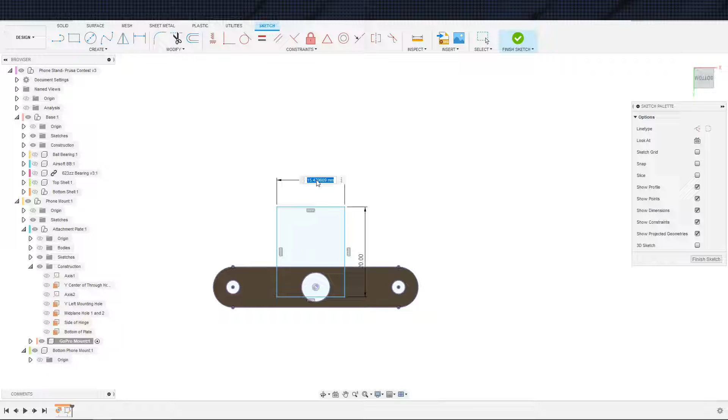So this is the mock-up of our GoPro mount. Again, we need to clear this guy. Let's go ahead and drop a center point in here. And we don't need the full center point. We'll just drop an actual physical center point into it. That missed. All right. Oh, and actually, no, that works. That works. Because I was thinking about going tangent to this anyway.

So we can just put the hole right there. And that is the outline. And we can now go and see what this looks like. And that looks terrible. So I think we can do a 3-point arc, probably. Which way do we want to do this? Yeah, let's see what the 3-point arc looks like. Again, 1,500,000 ways to solve any of these problems.

If I go center point, 3-point arc, what's that look like? Yeah, let's try that. There. 2. It's funny because obviously that's real close. It's one of those things that will be hugging the front there, but who particularly cares?

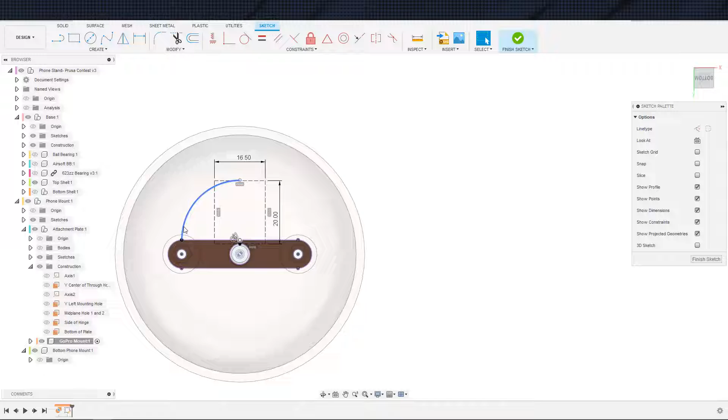Actually, let's check this out really quick. That's another question because we don't want it hanging off of the Lazy Susan. So where's my base? Top shell, bottom shell. Okay, no, we're way smaller than the Lazy Susan still. Wanted to keep a sense of perspective. So we're still good. Huh. Yeah, we may actually be fine here. I'm gonna say we're fine.

All right. Well, it's one of these things, right? At this point, I may as well just do this. If I'm gonna cut the corners anyway, then may as well just use the circle to keep it simpler. Design decisions. Alright, let's go with it. We can always change it later. Distance to object. Cool.

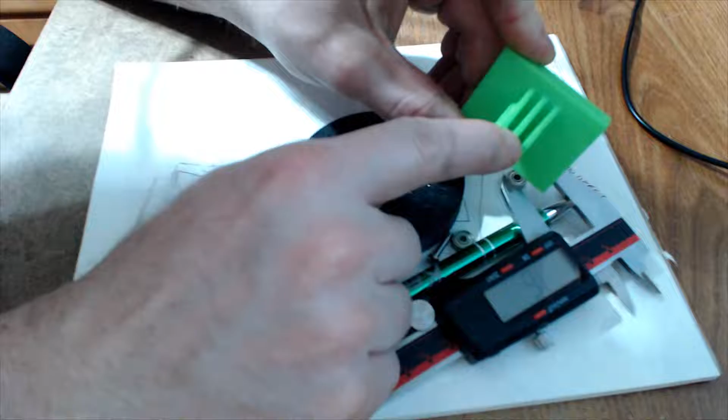And now we will go ahead and make this construction plane specifically on the GoPro mount because this is one that I'm using specifically. Actually, I take it back. We are going to go back to the Y center. And the reason I'm doing that is because if we look at the GoPro mount in physical, we have a center fin here. So we can go ahead and extrude that center fin out the 2 point.

This is saying 2.7. I wonder if this is in inches. What's that fraction? Looks like 7/64? 1/8. Okay, so maybe these are a nominal 1/8 inch. Let's check here. Well, now that I'm twisting it a little bit, it is getting up to 1/8 inch. What I was going to say is there's something called the internet, and we may just want to Google really quick.

GoPro mount specs. I misspelled specs, but shouldn't really be a problem. I'm trying to see if there's any links on this first page. Doesn't appear to. So let me grab an accessory really quick and see if I can't get a spec drawing. Yeah, a spec drawing on a product page for an end user product. I'm not gonna find anything here.

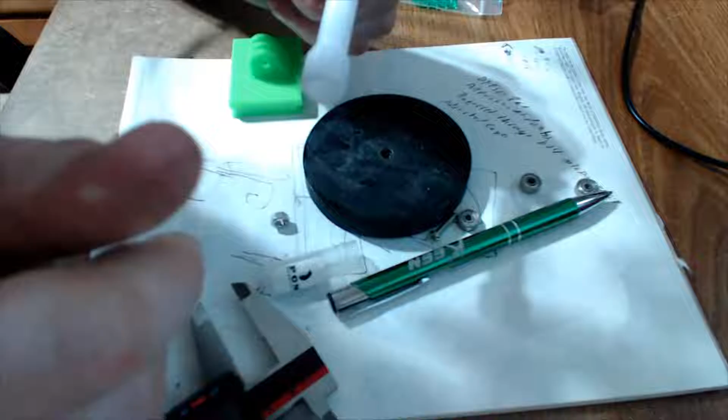So if we're going to be printing vertically, then we want our overhangs to be like this. We don't want a flat overhang on this side. We want the flat side going with the print. That's why I'm positioning it that way, and we'll go ahead and make sure that is perpendicular. And now I just need a measurement for an M5 nut.

Let's see, and I'll pull an M5 bolt out while I'm at it. So here's my M5 nuts, and we said this was, I keep on forgetting my numbers, about 16. All my options right now are 16 or 20 for the M5 bolt. I don't think I have any other sizes of M5 bolts, so I will just grab the M5 by 20. Alright, M5 by 20, got.

Okie dokies. Next thing to mention. So the next thing that I'm going to mention is how we tighten this down, because we don't have a real good way of doing that with just a bolt, with a button head bolt.

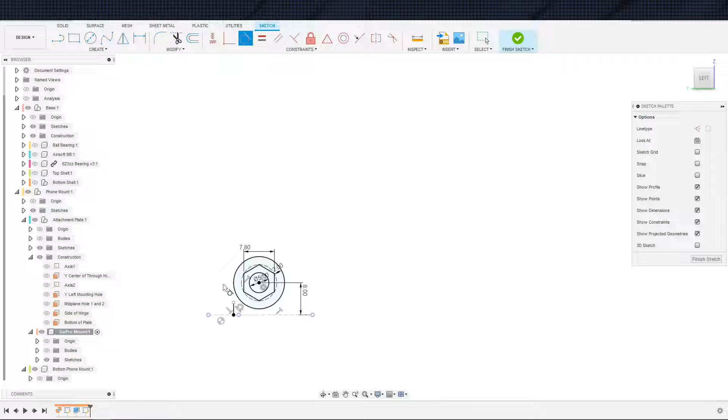But if I take an M5 nut here, thread it all the way down, then that acts as a hex head bolt at that point. Let me just drop this all the way down so you can see it. So now I've effectively made an M5 bolt with a nut head.

And the other thing that you can do is you can put a backup screw on this. Basically just 3D print a set screw is all you really need, because going in one direction is fine because the nut wants to go in that direction. It will just eat in and it will work. But if we reverse that, now you can see how the nut may want to start traveling up. But if you have a set screw in the back there stopping this from separating, then that's not going to happen. So that may be what we need to design here.

And chances are that actually probably already exists somewhere on Thingiverse or Printables. So it's not something I'll be designing on stream today, I don't think. But I wanted to walk you through that as a design consideration, because that's something that you are going to need to think about when you run into problems like these.

So, all that being said, let's go ahead and get on with the main show, which is getting the size of this M5 nut so that we can incorporate it into the design as a capture nut on the GoPro style mount. Alright, 7.8 we'll call it. And again, I'll do my 0.05 for 3D printing. We'll take you back over to Fusion. I just said 7.8. Don't let the Alzheimer's kick in.

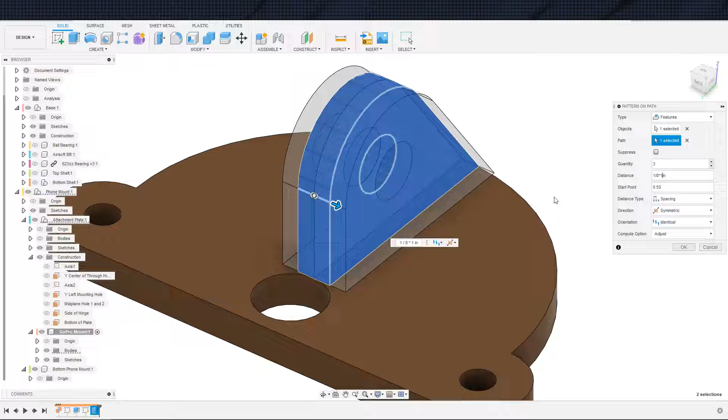Oh, you silly. Alright. 7.8. So there's that. Do I need to... yeah, I will. I toss these around here. That way I can offset this and that. It's one of those things. I'm not terribly concerned about it.

I might just go 2 instead of 3 on the walls here. And then, again, I said this was 8, if I recall correctly, which doesn't look bad. Yeah, 8 to the center of that does not look bad. I talked about doing 8.5, but probably unnecessary.

Alright, so this is our hole here. We need to be in front of that hole, so let's go ahead and draw another construction line here. Make that, whoops, not locked. Unlock that guy. I want that perpendicular. Make that perpendicular, make that tangent, and make that coincident. So there's that, and then I said we'd keep the same nifty design here with the tangent on that. Probably unnecessary, but we're going to keep it in there anyway.

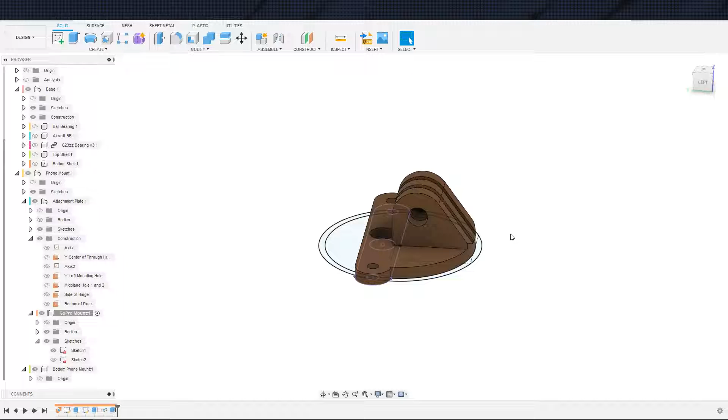And you can see how we're falling off the edge here. And I saw that was going to happen when I drew the box. And I'm okay with that. So we're going to go ahead and allow that to be what it is, and we should be good.

One interesting thing to note. This starting point, if you're not familiar with it, let's see if I can't get the hover dialog up. It's really annoying when you're trying to figure things out. Basically, it should only ever be 0.5 or 1. I don't know why it exists as it exists. I don't know what exactly it provides. I mean, you could probably show me.

Honestly, somebody could probably show me, oh, here's one obscure situation where you want to offset by 0.25%, because it only goes between 0 and 1. Going above 1 or below 0, I'm pretty sure, always provides an error. So it's always 0 to 1 inclusive. And in that case, it's one of these things.

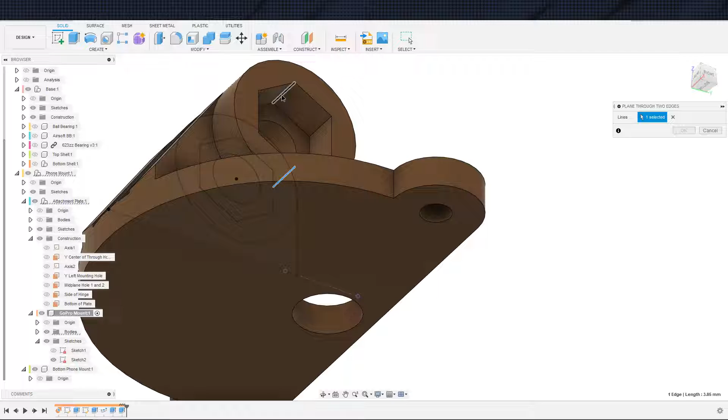What I'm basically getting at here is I kind of almost feel like the start point might be better off, instead of being a percentage of the feature, being an actual number, an actual unit. So for example, we're at 0.5 right now. If I could make my starting point be at 1/4 or 3/16, 3/16 might be the correct thing

right now. That would make more sense, because then I could say 1 divided by 8 is my thickness, set that as a parameter, and then 1 divided by 8 times 1.5 gives me my starting point. That's basically what I'm getting at. It's easier to use if it was something other than this random percentage here. And that's a bit of rambling anyway, so let's go ahead and get that cut.

And then we will come back to this plane, and I will throw another circle into this guy. And what we can do is extrude that. Let me hit the finish sketch button first, that way we're at the end of this timeline. And we can go ahead and extrude this. Wrong button. Flip it. And that will go ahead and cut everything to that lip. You see?

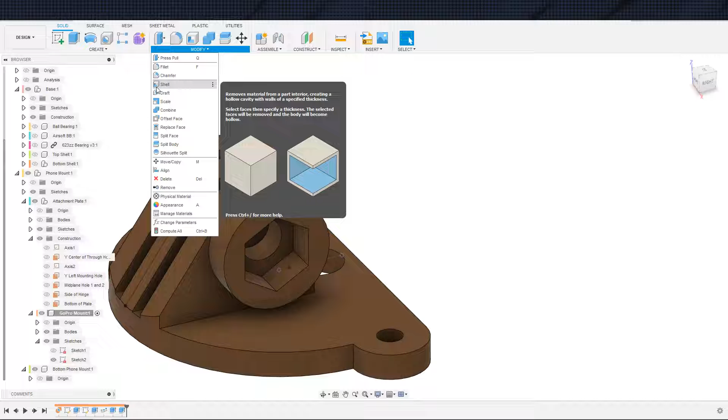And that is that. So now we just got to extrude the hex nut shape out. And I will do it like that from object. If I look at this as the front, which side is actually the front here? The front may actually be the flat side. The flat side may actually be the front.

And if that's the case, then it's on the left-hand side relative to the flat side. So let's come over here, there. And what's the thickness of my hex bolt? 3.845 is what I got on the calipers. Minus 3.85, I'll call it.

And join. And what they did here, which I agree with, and there's other ways I've done this. So let me just show you this really quick. This is one of the ways I've gone about this. I'll put a plane in here somehow. Plane through 2 edges, let's do. Okay. So I have, in the past, in order to get up to this part, actually no, sorry, that was the wrong one. I've done it this way. Sorry, I'm going insane. No, I did do it the other way. So, there we go. I believe I've done it this way.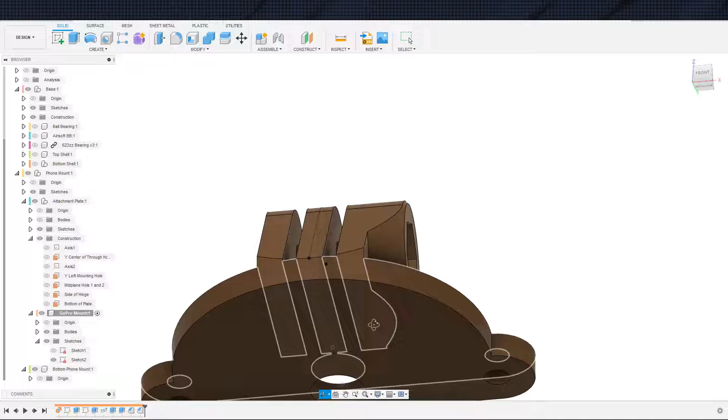And I've taken, not a projection, but an intersect of this and that. And then drawn, I've done something to the effect of this before, where I go ahead and give myself, on the other side, my 60 degrees right here. And then extruded that out. Again, it was something to this effect is what I did on my other design.

But the point being is that what they did on theirs, and is frankly easier to implement, is just, well, this looks more like a fillet to me, is what it looks like, but I'm going to go ahead and chamfer instead. Done this. Okay, so obviously that is not working. So there's a couple different things here. I can go ahead and chamfer from both sides. So chamfer this out. So we can go ahead and do that. And then chamfer the other way to get us the rest of the way for these print overhangs.

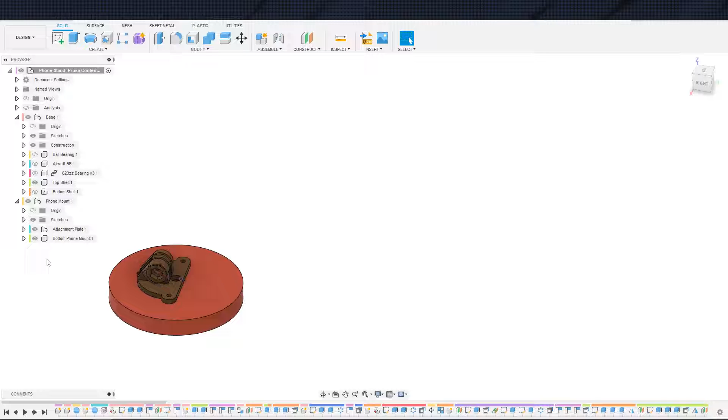1, 2, 5. Figure out what the correct number is that it likes. 0.3, 0.4, 3.9, 3.7, 8, 5. All right, cool. So that's one option for dealing with that overhang. Actually, I kind of like that. I think that's how I'm going to keep it. So that gives it a nice curved look.

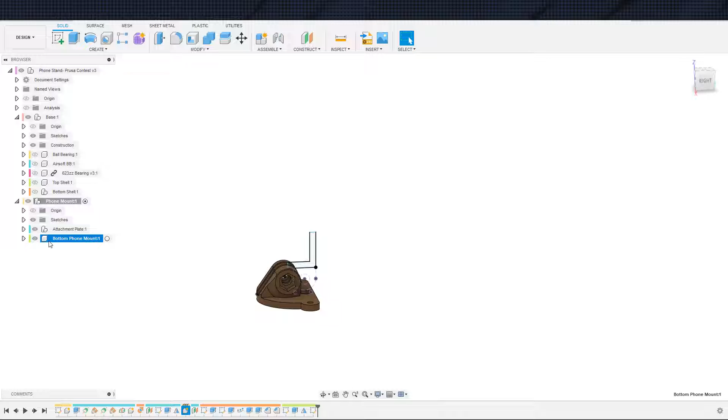Again, before on another design, I basically just made a triangle shape and extruded it out. And I can't remember how exactly I did it. I think I might have had a reference plane or a reference sketch in this direction that gave me 2 points. And then I connected those 2 points, which would be up here on this plane that I was sketching on. Instead of being down here where I actually connect the triangle, they would be up here. And then I extruded it so that the triangle started, say, right here and extended to right here. Anyway, point being is that's another idea of how to overcome these overhangs right here. And again, the overhangs on the inside of the screws don't necessarily matter.

So that concludes the GoPro mount. Let's go ahead and take a quick look at it on the rest of the base. Top shell. Yeah, so if the phone is over here and leaning backwards, parallel with these guys, let's say, then that's over top of the center of the Lazy Susan, so that's cool. If it's leaning the other direction, then that does pull the Lazy Susan. So in other words, you're watching your phone from this direction and therefore it is leaning back this way. If you're watching your phone from this direction, then that is off centering the Lazy Susan. But it's probably one of those things where, unless you got an iPad on there, unlikely to flip the Lazy Susan over.

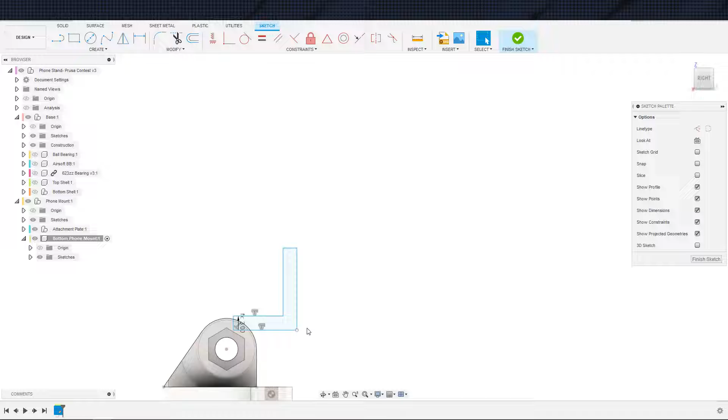And we have solutions that I hope to get to in this video, but we are running a bit long. So where do I want to stop is the question. We've been running for an hour and a half now. I don't particularly mind going 2 hours, but I don't know how much more we get done in 2 hours. So, let's just go for the 2 hour mark. It may take another hour after the 2 hour mark, so we might be up to 3 hours in order to actually get this done. And I'm not in that much of a rush because the project ends in about 8 days now, I believe is what our countdown's at. So we still got plenty of time.

Once we're done this, we're done this. So if I spend another half an hour right now and we're not done the phone mount, it very well may be, again, another hour stream to finish it up, and an hour stream is plenty. Well, I shouldn't say plenty. Obviously, there are people who stream a lot longer than this, but an hour stream is satisfactory to me for a design stream.

So let's hop back in here. That is the front, and yeah, okay, so we will now hop over here. So obviously we started designing this for our natural, what I'll call it, our natural mount, our proprietary mount, whatever the heck you want to call it, but we are not designing for that at that point.

So, how... I'm not sure how that comes through on the mic. Oh, now I'm yawning. Okay, I just looked at the time and now I'm yawning. That's great.

So let's grab a reference point just so that this is not blue and this is black instead. So it's constrained is the correct word I'm looking for. Let's just center it on this random origin point right here. Now, I said 60 and 90. If I recall correctly, it doesn't look like I actually wrote it down, so let me just write down 60 and 90 for future reference. Min open, max open. Cool.

So, if that is the case, we are going to want some degree of overlap between the bottom piece and the top piece. So let me just draw a rough, again, these are rough right now. We're going to want some overlap here to add stability to it, to add meat to it, so that it doesn't twist around and stuff. So we got to decide what that is. If we call that an inch, we call that 25 millimeters. I'm going to go ahead and write that down.

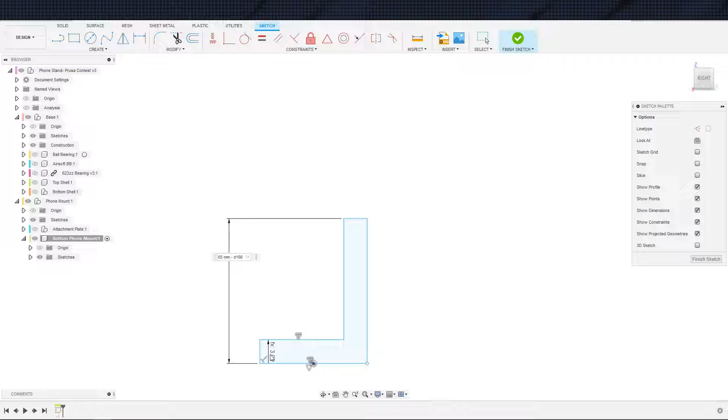So if we have 25 millimeters off of, let's say, the 90, because the 90 is going to be our biggest opening. Yeah, I should be fine taking off the 90. So 90 minus the 25 would get us to 65. I have to do math on paper now that I'm streaming, because that whole debacle with the gear ratios is traumatizing. So 65, and then we divide it is the distance.

I did this wrong. I'm glad I wrote this down. It's 90 plus the 25. All right, 115. Right, 115. So 115 is our total amount of plastic. Nah. Okay. I'm still doing this wrong. Wow, okay, maybe I haven't been streaming too long.

Alright, let's bring you back over to the camera so that you can see me screwing this up in real time. So over here is where I was screwing it up. Let me use this picture of our phone mount to demonstrate. So our overlap here, this box right here, is going to be 25. So this overlap of 25 is actually 25 on both the bottom and the top.

So if our max opening size is 90 on the inside, this is 90 right here. I divide that in half to get 45. And then I have to add 45 to a full 25 instead of dividing the 25 in half afterwards, which is what I was doing down here. X that out. Now we get 70. So each of these segments need to be 70.

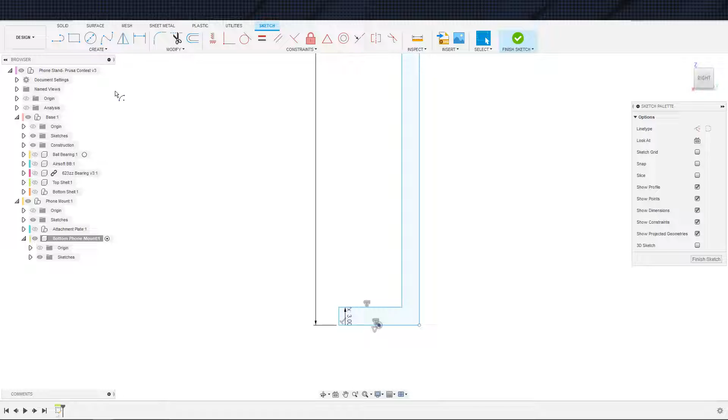So on the inside here is what I was saying. That needs to be 60. Whoops. Why are you over constrained? Oh, is this one of those situations where Fusion is not showing me all my numbers? No, it doesn't look like it. Oh, it's because it's offset. That is why. So because this offset is running here, it's looking at this and it's like, you can't do that because that's an offset. You're taking dimension between an offset and a... Alright, whatever, Fusion. Don't be silly.

Fusion, frankly, you should know that this distance right here, which I'm calling 65 minus 3, that's how you would do that math, Fusion. I realize that you're a little slow, Fusion, but that is how that math works. You know that this offset is here for 3 millimeters, which means that this arm is necessarily... I know, I'm complaining. I'm complaining a lot today.

Alright, next thing we got to do is figure out how much meat we need here for a phone. So I'm just going to measure my phone in this case really quick. This OtterBox. Actually, I don't think this is an OtterBox. I think it's an off-brand. Regardless, I'm getting 11.5. So if we call that 12 to be safe, do we want to call it 12 to be safe? Do we want to call it 13? 12.5 would be half an inch.

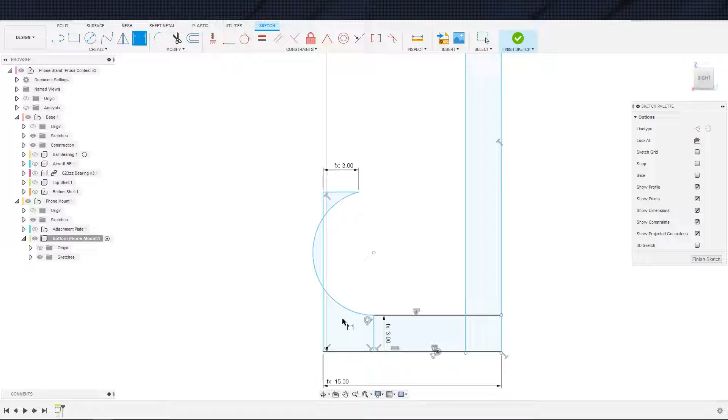If we call it 13, let me look at, because my case might be a little bit bulkier on the S7, even though the S7 is thinner. Yeah, it is. So you can see this. I had this wallet case for my S7, and obviously that is a lot of fabric in there. So I'm going to go ahead and measure this guy instead, and then add a little bit to this guy. So this guy is already, if I'm trying not to squeeze him, something like 18 already. So if we call this 20 on the inside, that should be fine.

And it's one of those things, we can go ahead and maybe put a little bit of a curve or something like that. So at the bottom here, it'll be 20. But at the top over here, it'll be like 21. Yeah, let's do that. I like that idea. So we are going to draw an arc in here. Arc, and I think a center point arc. Whoops. Nope, not like that. I do want a center point. Oh, no, tangent arc should be fine. Right? Yeah, tangent arc should be fine. Cool.

So let's do that. And then we'll just extend this out and perpendicular that. Actually, let's not do that. Let's do that and then that, so that we have some thickness here. That thickness will be... let's not do that thickness until I get it constrained correctly. Perpendicular, perpendicular. And now we can do wall thickness there. Cool. Alright, so at this point, which is the furthest point. Okay, Fusion. Don't be a doofus.

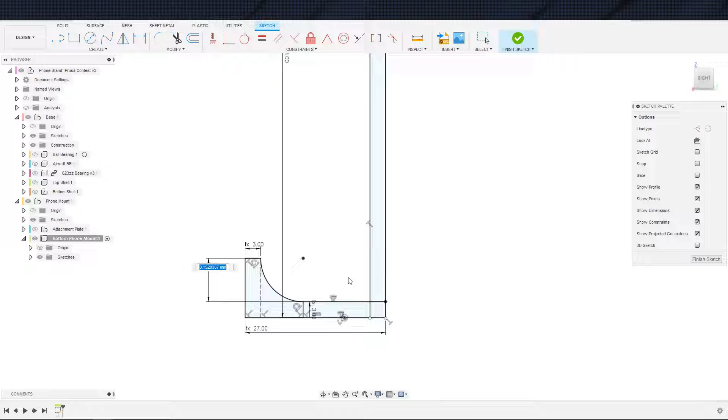Wait, is that... Are you not square? Okay, you are now square. And you are going to go ahead and be vertical. And what else is not constrained around here? Undo drag. Let's see if we can do this. Okay, we can do that.

All right. So we need to subtract 2 wall thicknesses, 2 times wall thickness. So that's this wall thickness here and this wall thickness here. And then we want the inside here at this furthest point, which is these wall thicknesses here, to be, let's call it 21. Plus 21. Okay. Fascinating. Okay. How do I go about this? Basically...

You know how I said minus? I want to add 2 wall thicknesses. Cool. Let me just double check this. This should be 21 now. It is 21. Okay. All right. Back onto what we were dealing with before. So this, let me do this. Throw this construction line in here. This is the way I'm thinking of fixing it at the moment. Just making this tangent so that, yeah, that works. So you see how that is always straight up at that point?

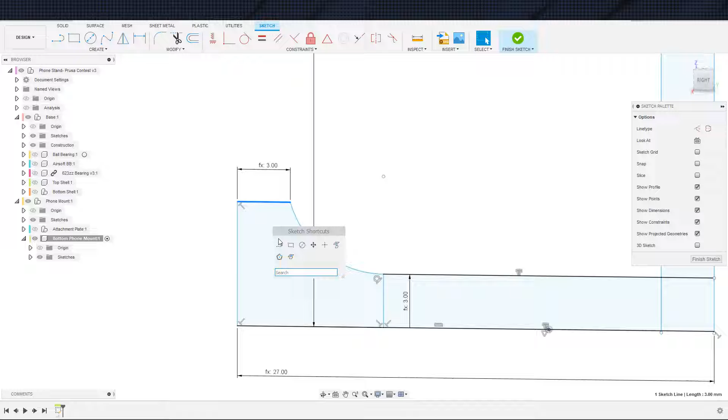Now, what else is changing here when I do this? Oh, okay, just the curve. The position of the curve is changing. Took me a minute to figure out what exactly was changing here, but how deep this curve is changes when I change the depth here. So the question is, between here and here is going to be 21, which is the thickest that we're making this. So if that's 21 there, the smallest doesn't necessarily matter, right? So can I even constrain that?

I can't constrain that. So what we may just want to do is constrain this and call it a day. And how much do we want? Probably a 1/4 inch is fine. So something like 6-7 millimeters. So a depth of 6 or 7 millimeters here maximum. It's one of those things. This is in theory going to be clamped in, and we can always make changes later. So I think that's what I'm happy with.

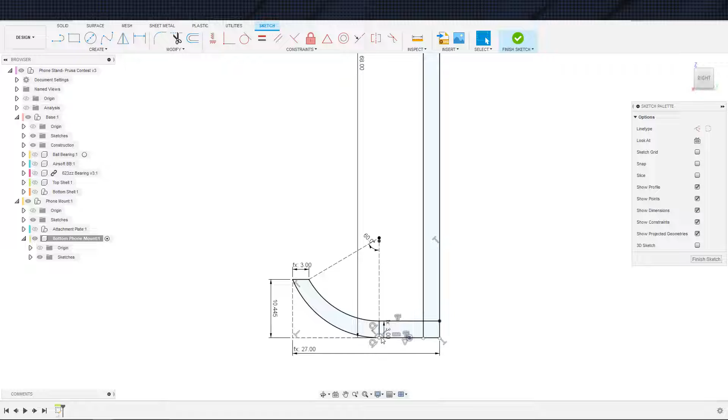Okay, so one thing to mention here is that this is not a good design for printing, because we are intending to print it laying down like this. So this lip that I added in here to kind of cup the phone, which is my idea, doesn't print very well, at least with that much overhang. And we can

fix that. We can fix that by deleting this. Not radius. That and that. No, not that and that, because that is guaranteed to be 90. Okay, yeah. Now that I add in this line, this is always like that. So what we will do is, well, that's going to be perpendicular too, right? No, okay. So

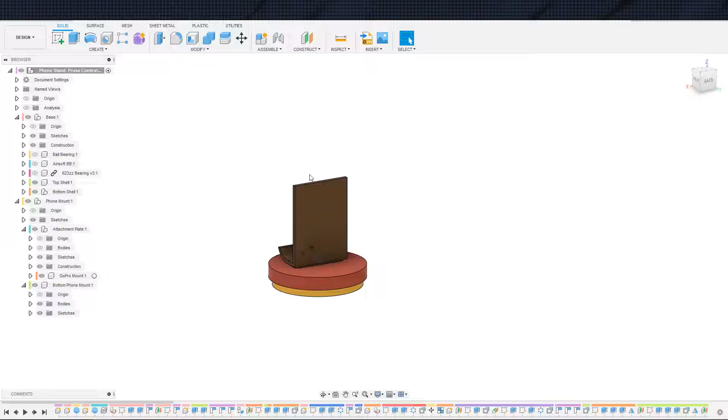basically what I'm trying to do is get this angle here, which should be fine, and we want this to be no more than 60, 60 being a good angle for the overhang. So that is what we're going to do. Now, what can I adjust here? Okay. So we can make this dip a little bit bigger. So back to, I called this 7 before, right? Yeah, and now Fusion doesn't want to allow me to do anything with it. Typical Fusion.

It's one of these things where... Alright, you know what? I have decided that I like it like that.

Now, the last thing I am going to do here, and then we are going to go ahead and be done for today, because obviously I am losing energy. Well, you know what? I don't even think this would be a problem if I was losing energy. I could probably power through it. It's just that I don't think that we're going to get nearly as far done as I would like to get right now.

Basically, where all that was going was we're going to put an opposing arc in here. That way it's got a little bit of aesthetic pleasure to it. And now we will go ahead and extrude our masterpiece. And we'll symmetric extrude. And let's see what on my phone looks like a good amount of thickness to be holding the phone by. I'm going to go with 2 inches, about 50 millimeters. So let's extrude that 50 millimeters. And that will be good.